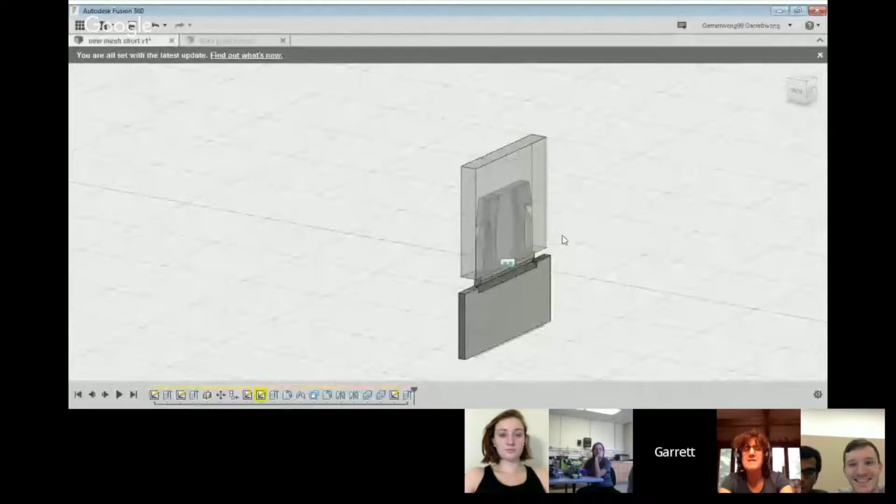I'm not sure if that works, I've never tried it before, but let's see, because I'm a little confused. I do know that the palm mesh takes something like 13 screws. I found them at a very good price, but it's still a lot of screws.

Can you guys see my screen right now? Yes we can. Okay, so this is what the screw looks like on the inside, or the clip looks like on the inside.

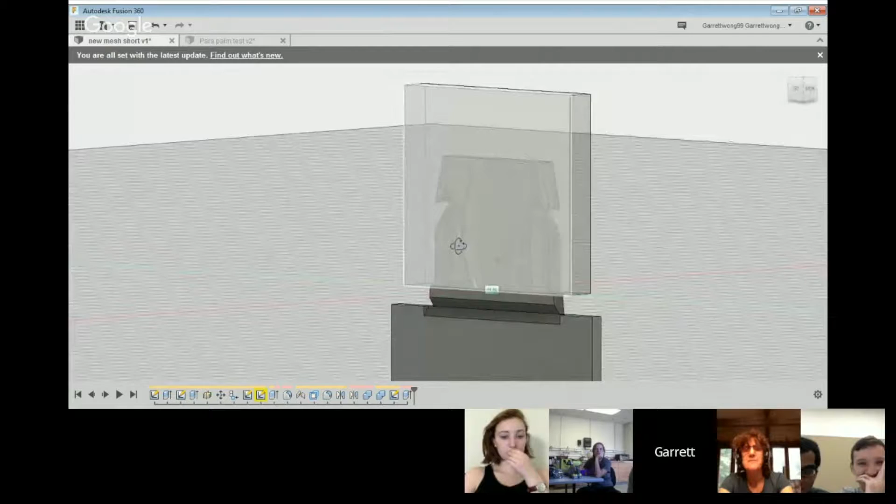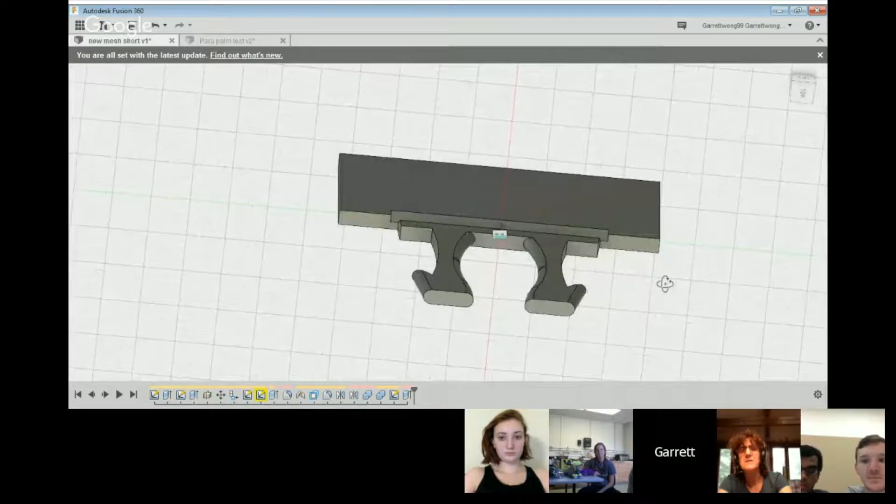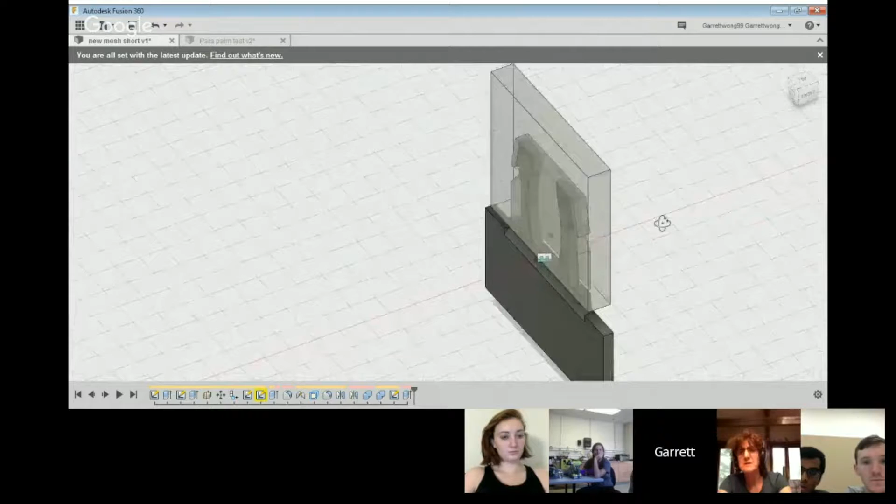Basically, when you push it in, it clicks in, and that prevents it from sliding out. There's a little notch here that makes it easier. This is printed flat - this component is printed flat, and it's just a prototype, so I only printed out part of it. But this is eventually going to be integrated into the rest of the palm mesh, and then these clips, this area over here, is going to be bent up and be able to click into the palm. So if you're imagining this is a section of the palm, this would click into the palm and eliminate the need for screws.

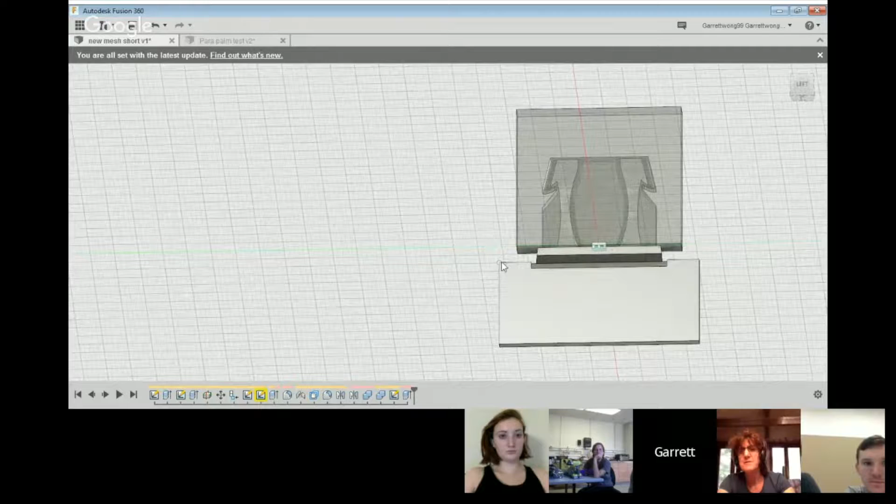Would you have to thermoform it, or do you just have to bend it? You just have to bend it up, make sure it's flat. I might even add a section over here that's a little thicker so that it stays set while the others are soft, because the time it takes for PLA to heat up is proportionate to how thick the material is.

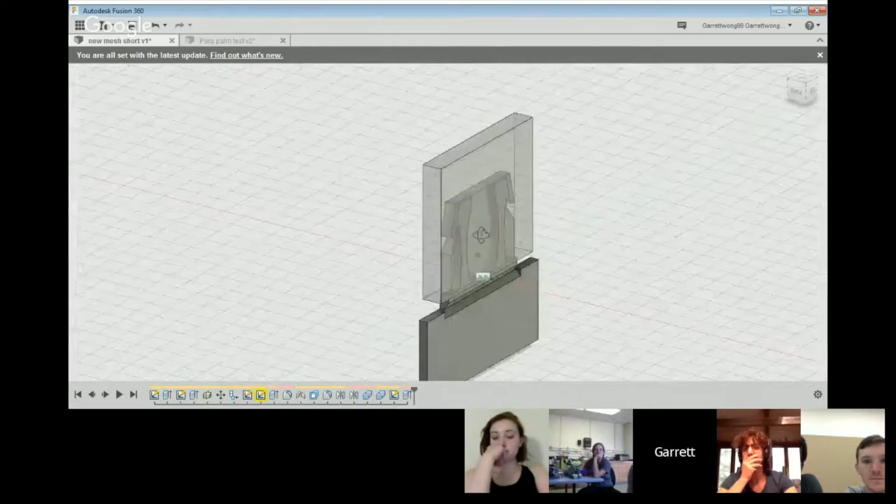So yeah, that was the work for this week. I also modeled a different hand for Andreas in Fusion - it's the Ebe hand for the clinic in Haiti, and hopefully it doesn't crash.

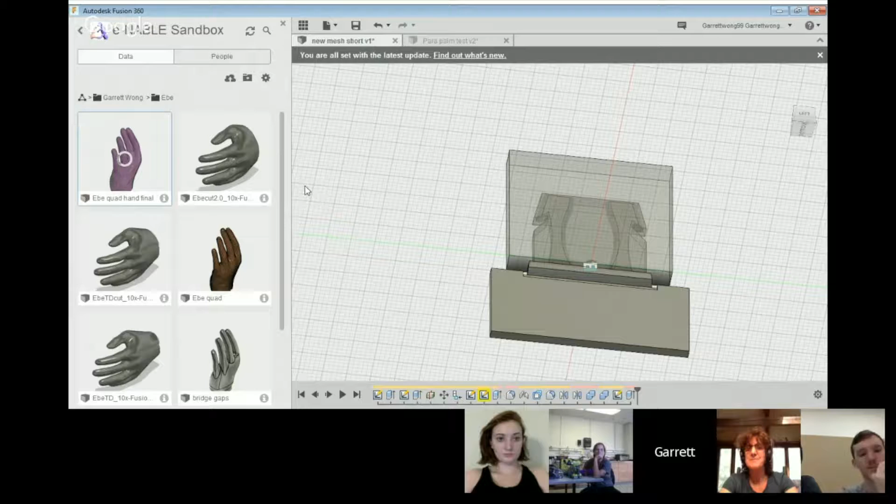Do you have any more information on that hand that you could share for people who don't know much about it? The Ebe hand is basically a very natural looking hand that looks like an actual hand. It doesn't move, there are no moving parts right now, but it's made so that people can blend in a little better, and that's what it looks like.

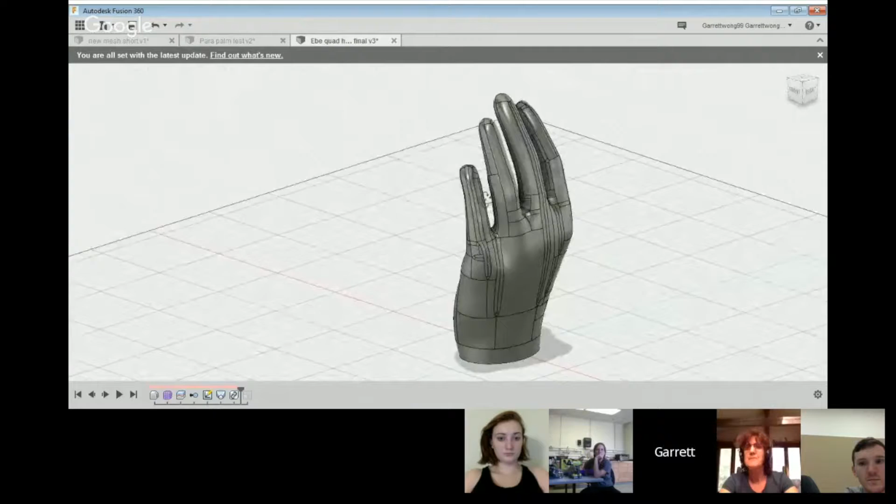So this is the STL file, and I modeled it again on Fusion using surface modeling. It ends up looking like that, pretty close to the actual thing.

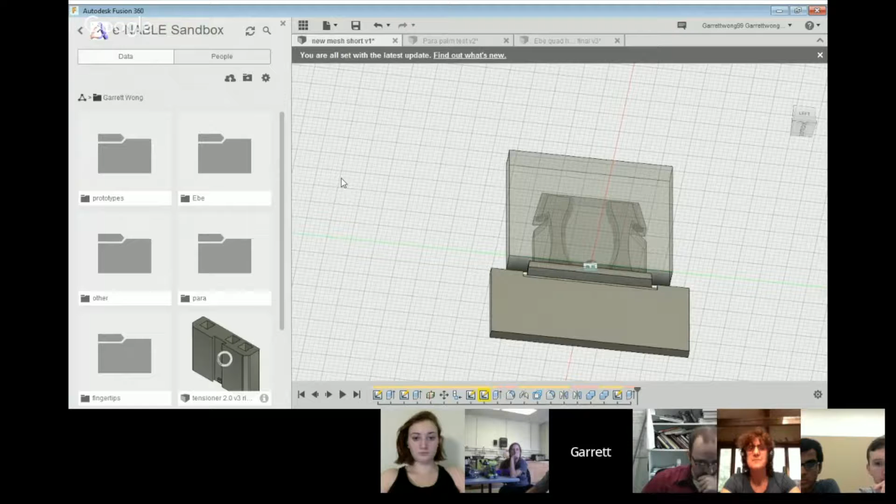There are some patients in Haiti who need resizing for their forearms for this hand. So I went through and customized the parametric model so they could just enter the length of their forearm on their good arm and the circumference of the thickest part, and it configures a forearm for them. Most of the work was done by Andreas, but I basically plugged in the numbers so they could have resized forearms specialized to them.

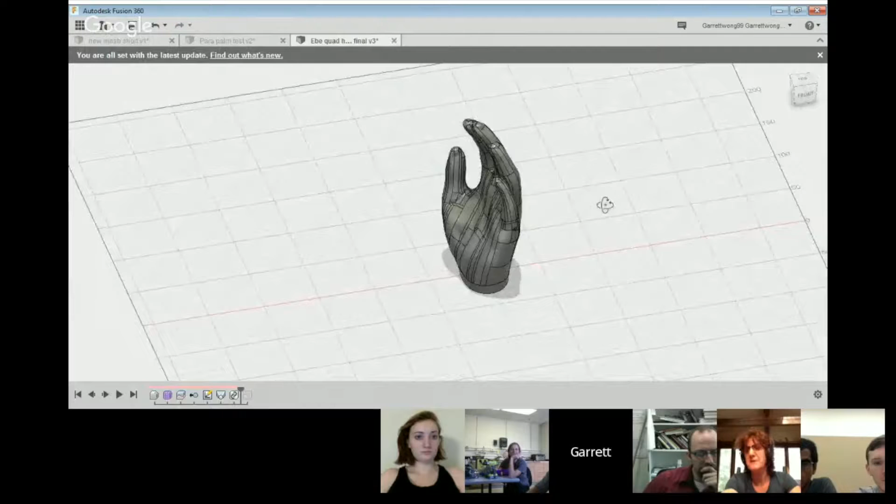And then this hand would attach onto that forearm as a terminal device, right? Yeah, exactly. We export the STLs to them and send it, and the patients in the clinic in Haiti receive their new forearms. It's a great model, and it's been working well, but with what's actually going on in Haiti...

Actually, I kind of cheated to make this one. A guy at work introduced me to Autodesk Remake, which takes the STL and converts it into quads, like a quad ball, instead of the triangles you normally see in STLs, and then takes that and...

Hang on a second, I'm sorry, because I'm not that technical. Could you explain what you mean, please?

Okay, so basically STLs are a bunch of triangles put together, right? Right, I know. And Fusion can't really convert that into a Fusion file because it's kind of like a PDF—you can't go backwards. It's kind of difficult to do that.

So what Autodesk Remake does is take the STL file and export it out instead of triangles as squares, and for some reason Fusion can take care of that. Then I take those squares and convert that to a T-spline, which then converts into a body, which is what you see right now.

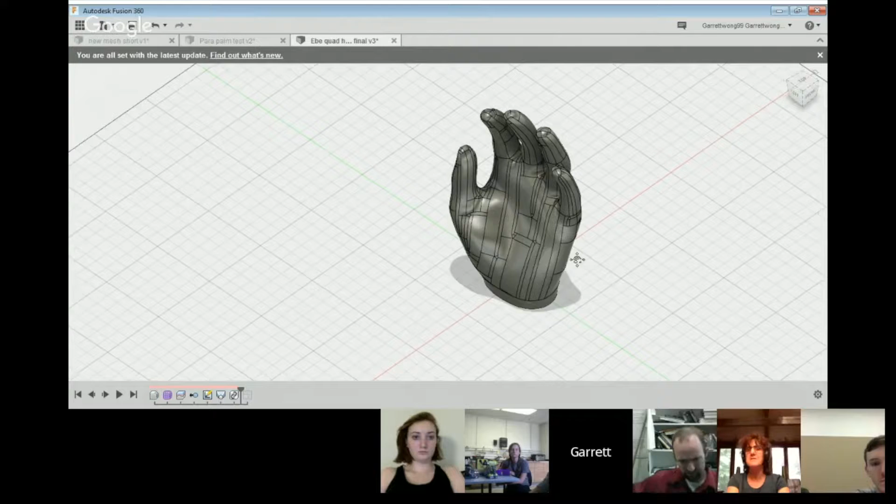I thought that was pretty cool. It improved the workflow a lot, which was interesting. So that was the work for this week.

That's really good. Does anybody have any questions for the work that Garrett has done?

Hey Garrett, could you explain more about this Autodesk Remake thing? So, based on what I understand, you can convert an STL into this intermediate thing, which can then be converted into like a body? I'm not quite sure.

Yeah, exactly, it's pretty cool. The thing is you just have a little bit more control over your file eventually when you finish. I mean, I couldn't do this for the entire Phoenix hand, because I need to control so many little parts of it, so I had to design the whole thing again.

But since this is just like a natural model, it's easier—I have a little bit more control over it if I convert it into a Fusion file. Instead of modeling the whole thing with surface modeling, which is very difficult because you start with a box and push and pull like clay, and it's very hard to get that natural form because you get a lot of folding that ends up messed up. So this was just a cool way that bypasses that, and I thought it was pretty interesting.

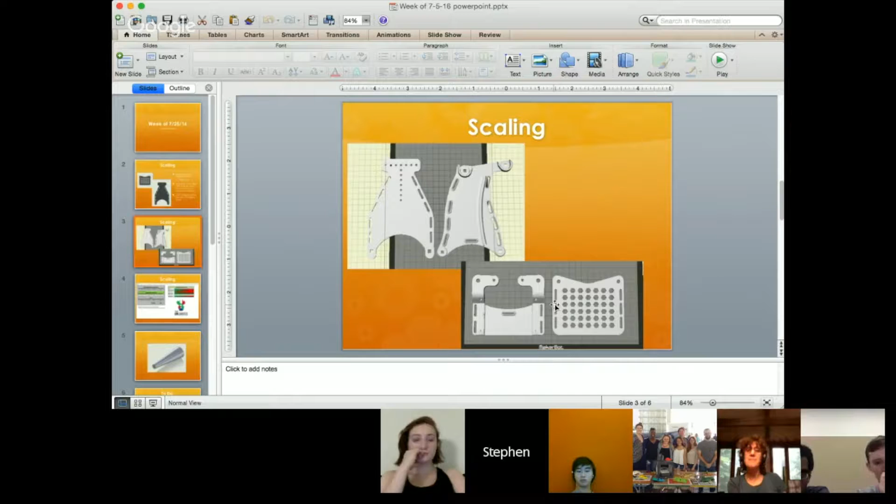So here we have them side by side - this is mine, this is the Unlimbited arm. Just you can see the size change, and then I scaled one up that I printed out today to 120%, and it's pretty much the same. It's virtually the same, so it should be the same theoretically.

And for you guys who aren't familiar with the scaling chart, this is what it looks like. It's really simple, it's really awesome. All you have to do is take 3 different measurements off of the person's arm, and then it'll come out with a hand that is supposed to fit them and also supposed to be the same length as their other arm.

That's another thing I was encountering - for mine, I don't necessarily want it to be the same exact length, because you're going to have a piece of PVC on the end, and you're going to have 1 or 2 or 3 or 4 inches on the end of that. You don't want this ungodly huge device on the end of your arm with an extra 5 inches on it. So what I'm probably going to do in my design is just take off an inch at the 100% scale and then see how it scales up from there, and see if that makes it a little bit better, a little more elegant, I guess.

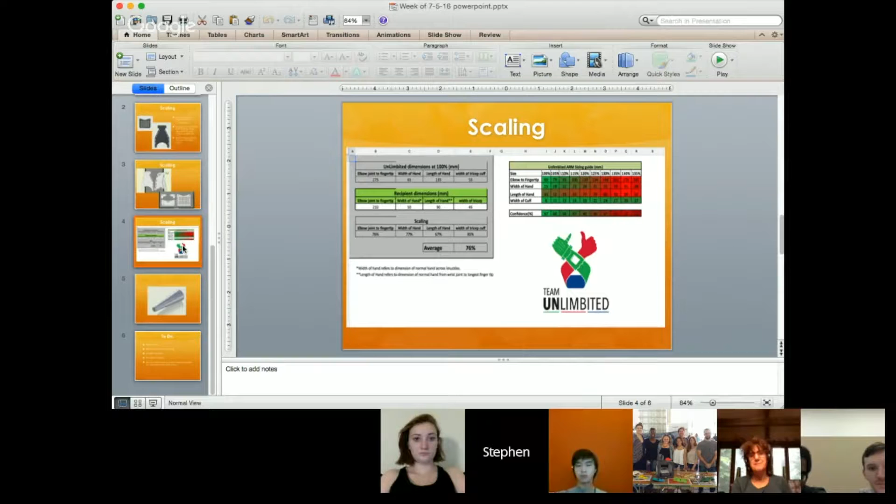So stuff to do this week - I'm ordering the Velcro replacement, which I'm pretty confident in. I don't think I'm going to have any problems with it. Just a reminder, that belt with the 2 hinges on it, you can just pull it back with 1 arm. Then I'm going to make it pretty - make it aesthetically pleasing, hopefully add some cool designs to it and stuff.

And then once I'm done with that stuff, I'm going to set up my official recipient testing and get some actual feedback from someone who knows it best.

A little bit more down the road, as an end goal, I'd like to have - whether it's an Instructable or my official turn-in thing - just a catalog of different attachments that people can download really easily. It'll make it more pleasing for people to download, because if you're just downloading the original files for the device, you have nothing to put on it, and no one's really going to be enticed to do that, I guess. So that's my plan.

Another small factor is that when I change the scaling down - this piece right here is the piece whose length is supposed to be the circumference of 1-inch PVC. When I was originally modeling, I was going off of my actual arm sizes, and I would fit 1-inch PVC because I had a longer arm. But when I scaled it down to 100%, which would ideally be like a small child, 7 or 8, I decided to change this to the circumference of 1/2-inch PVC.

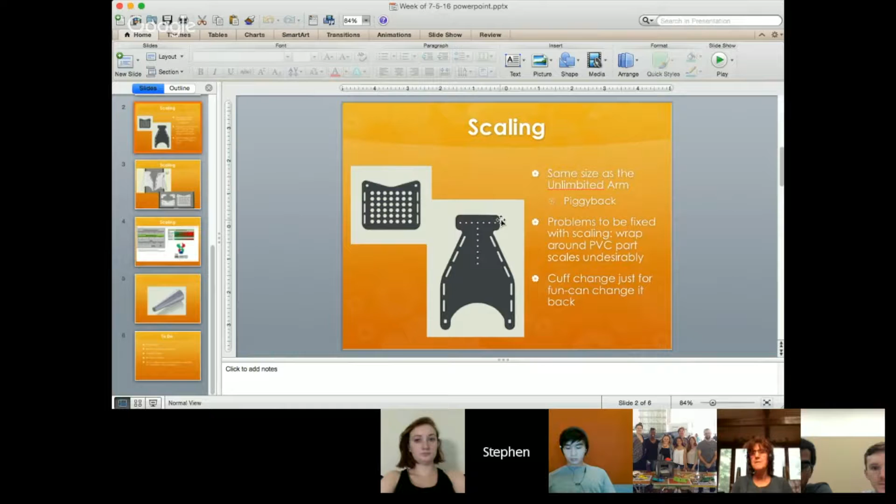That creates kind of an interesting problem - as you're scaling it up between like 130 and 150, you're going to be in between where it's not really 1-inch PVC and not really 1/2-inch, but it'll still fit. Based on our testing with actual screws and bolts, it'll still hold on really nicely. Basically that just means all the attachments, I'll make twice - one for 1/2-inch and one for 1-inch. So it's not a huge deal, just a little something.

So I have a question for you with the jig - if you could just go back to the slide with the jig.

Is there anything else you could use that's not printed, so you're not tied down to the printer problems? I mean, yeah, we'd gone over the dowels and stuff before, but I think because you had talked about that. I was wondering too if you had anybody there with a lathe that could just turn a piece of wood to the right size for you. I mean, that wouldn't help everybody, you'd still need a file or something. Okay, but I'm just thinking to try and give you a solution.

He's saying that we do have that, and that we could do it. Yeah, we'll mess around with that this week, because when we did our first Unlimbited arm here, that's exactly what we did. We made a dowel, put wood on the lathe and turned it to the size we needed, and that worked really well. We've kept it to use for that particular size. But with yours, I don't think you have as much of that sizing issue, so it might help you in the short term so you're not tied down to waiting for something large to print, or if you're having a printer problem.

Yeah, we have that around the campus. It's just a matter of tracking it down and bringing a block of wood in there one day, and getting someone who knows how to do it. Yeah, a lot of the times they have techs who are around, so we'll track that down, because we could do it, but we're sort of far away.

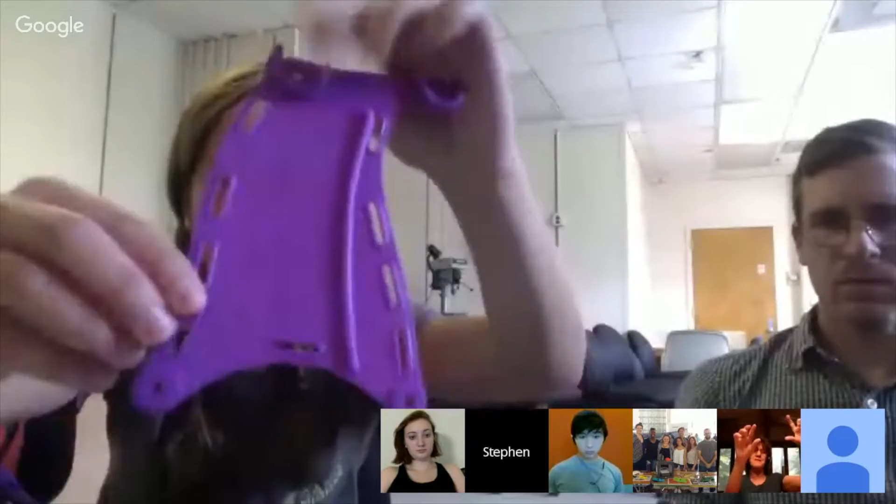So what I'm talking about is that it just— hold it up a bit, there you go. Yeah, so it comes up at the elbow joints, like you can see, it's the same depth and it just protrudes up. I didn't put that on mine, and it seems to be working okay, but I didn't know if there was a reason it was there.

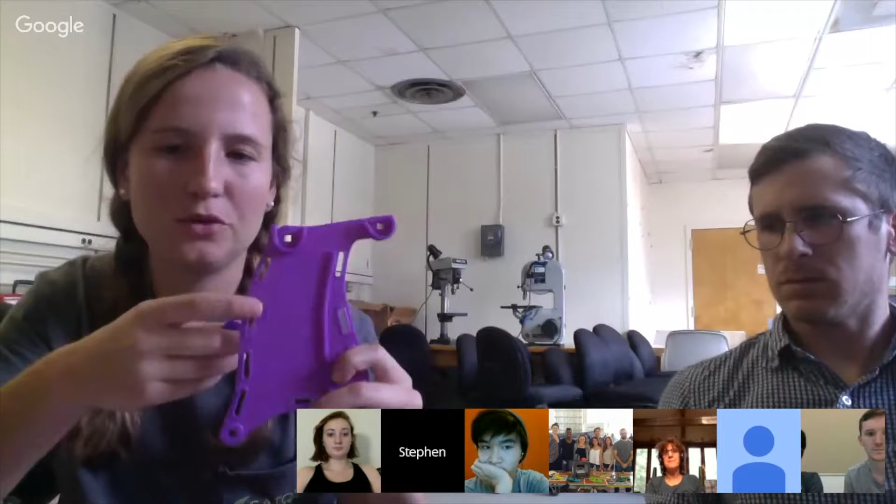Is that down to giving it additional strength at a weak point? Could be. On the regular gauntlets, when we do the flat at the hinge, you put additional material there because that makes it very strong, and because you can print it around as opposed to this way, it adds strength. So they may have done that for additional strength, since that's such a point of stress. Yeah, and I guess they had the same protrusions going around where the Velcro slots are. I think that might be to give it additional strength, since it needs sliding over a lot.

Okay, that's it from me. Has anybody got any questions, comments, or feedback?

Oh, do you want me to talk about the guitar project too? Yeah, do you want to see the guitar arm video? So we here at GRIP, which is like the UF club, have a lot of projects going on right now, and one of the side projects, our first venture into electronics, is basically to have an EMG sensor hooked up to chords and guitar, so when you flex your arm, you'll be able to play the chord.

That was a first try. And then, which one did I get? This one, I think, this is the most recent.

So that's our 3D printing tech, John, who can't play the guitar. We expect it'll sound better, but the idea would be we'll get the actual fingers to line up with the strings a little bit better and maybe get the fit right. But I'm going to start a senior design project this year that actually hooks up some of the sensors and does more of the muscle control of those servos, instead of just having them on a timer programmed.

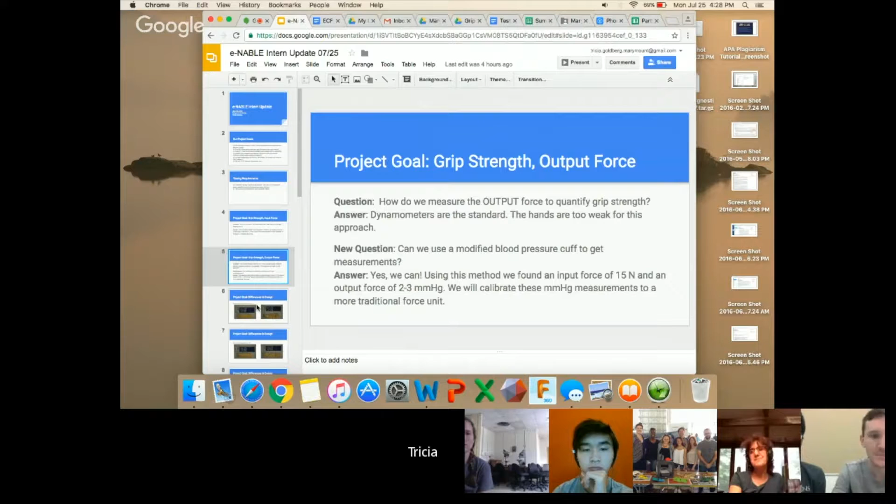We're going to calibrate these millimeters of mercury measurements to a more traditional force unit like the Newton, to get an idea in real language about what that means for us. But we were able to solve both of these problems. Sounds really easy in hindsight, but it took quite a bit of thinking. We found that each of the hands we're testing are all right around that same level.

So that led us to our next project goal, which is the differences in design.

This week I focused on sized 1.3 hands. I used a Phoenix, a Raptor Reloaded, and then a Phoenix hand with the whippletree as the tensioning system. The other two hands used a 3-pin tensioner.

So right here on the left is the before image, and on the right is the after image of the grip. This e-NABLE bookmark is just to give an idea of scaling.

I was on travel, so I wasn't able to have any graph paper with me, so I used something of ours instead. I re-rolled the Theraputty each time to get an idea, so we weren't using the cylinder to measure the hand grip after 3-4 tries. I really tried to make sure we were being consistent with what we were measuring.

So you can see that the Phoenix hand left a pretty good grip inside. You can clearly see each of the fingers left pretty good indentation. Even the strings got pressed into the putty a little bit.

I will figure out how to upload this to the sandbox so everyone can take a look in more detail. The yellow was very soft - this was actually the tan, it looks yellow in the photos, but this is the extra soft. The black does not photograph very well, but that's also the toughest it comes. I wanted to pick something that could give us clear, easy results with little fussing.

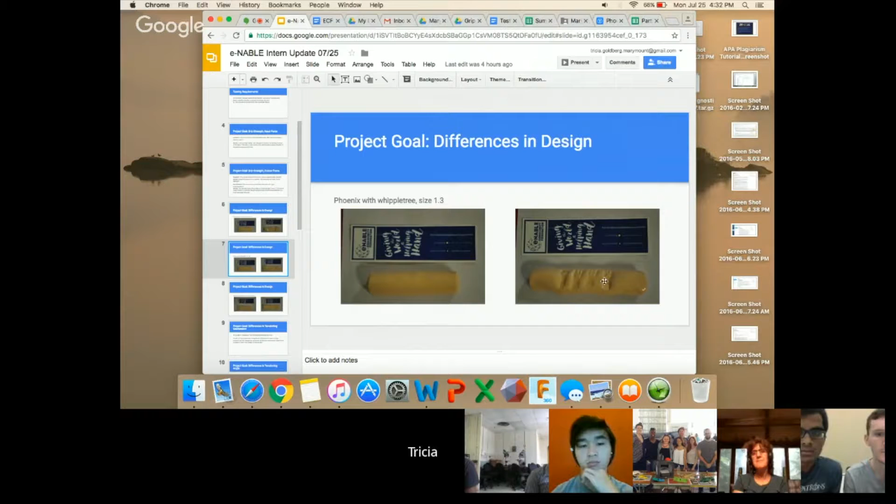Each hand, though, was pretty similar in the impressions regarding depth and change in surface area. But if we go back to the whippletree, this was the most faint of these particular trials - interesting, not what I expected, but we're going to come back and keep retesting these.

We also want to see if the tensioning mechanism really would make any significant difference, like I said - the whippletree really hasn't changed a whole lot. But then we wanted to see if the tensioning angle was going to change. On the left here is where it originally sits at 30 degrees, and on the right is when I changed the tensioning angle to 45 degrees.

This is something we had discussed at one of the events - a MedStar event in Georgetown - and we were wondering if changing this to 45 degrees instead of 30 would increase the depth, the impressions, and the grip strength. What I found, even before I started taking impressions, was that yes, there was a difference. So this is the original impression at 30 degrees.

At 45 degrees, not only did the length expand for the Phoenix with the 3-pin tensioner, but the impressions were also very clear, if not the same. The length of the putty changed more so, meaning the grip was a little bit stronger. Even if the grip pattern depth is still the same, if the surface area length is changing, that means there's a deeper grip.

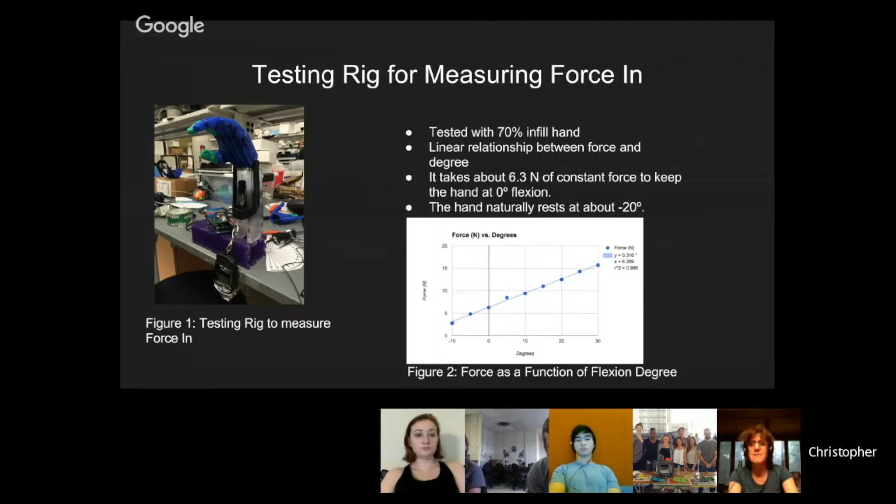That's what we tested with one hand. Overall we're going to be testing across different hand designs to see how that changes, so this can provide us a way to quantify between hand designs.

So that's one half of the equation. The other half is measuring the force that the hand generates for a given degree of flexion. Tricia has a method of doing this that uses a blood pressure cuff.

Unfortunately, our hands don't have enough strength, or they're not large enough to really make that work effectively, so we had to get creative. We cut off the pressure gauge from the blood pressure cuff and connected it to a balloon that was partially inflated and superglued onto airline tubing. This reads naturally a pressure of about 20 millimeters of mercury, and then as you squeeze the balloon, that pressure will increase.

Our force out follows a similar linear trend to the force in, where the further the hand is flexed, the more force it can generate, up to a strength of about 0.8 newtons. It's not a whole lot, but this is also a fairly small hand.

It's a 77% scaled hand, so obviously the larger the hand, the more force you're able to generate. To find the force and convert it from pressure, you have to find the surface area that your hand is connecting with the balloon, and then multiply by that scalar factor.

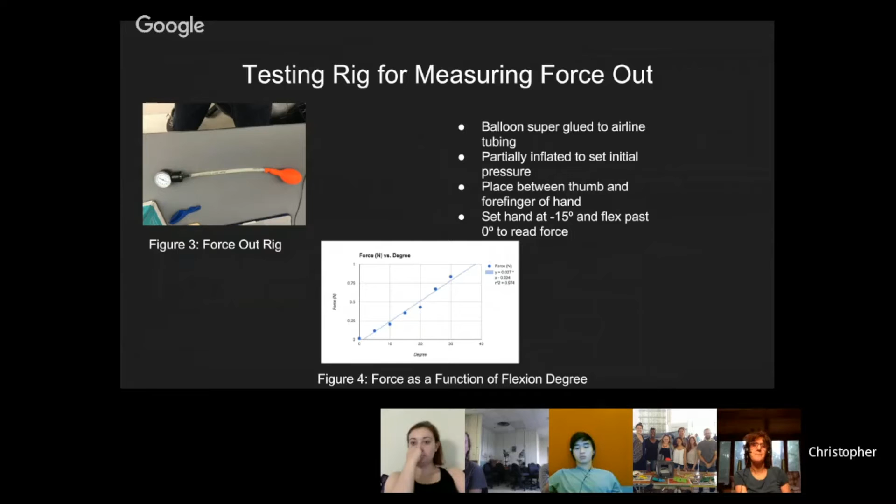So when you put them together, we combined the two rigs, the force out and the force in, to give us a quantitative look at what happens at each degree of flexion in increments of 5. From 0 to 30 degrees, we're able to see the force efficiency between what it takes to flex the hand and what kind of force you can get out of it.

As you can see, it's sort of logarithmic, or it levels out at about 5% efficient, which means it requires about 20 times more force to put into the hand than what you get out.

What we're really looking at this for is comparing different styles of hand or different methods of printing the hand. Currently this hand we tested has 70% infill. We have another with half that infill at 35%, another with a thicker hinge for the fingers, and finally a fourth with a different, less flexible filament material.

Our goal is to figure out a range between how much force it takes to close each hand and how much force you get out.

What we can do with that, as we mentioned last week, is that as a patient progresses in the strength of their wrist, they can have hands that generate more force but also require more force to use. This will both strengthen their muscles in an area that would otherwise be difficult to exercise, as well as give them the ability to hold more objects or for longer without tiring.

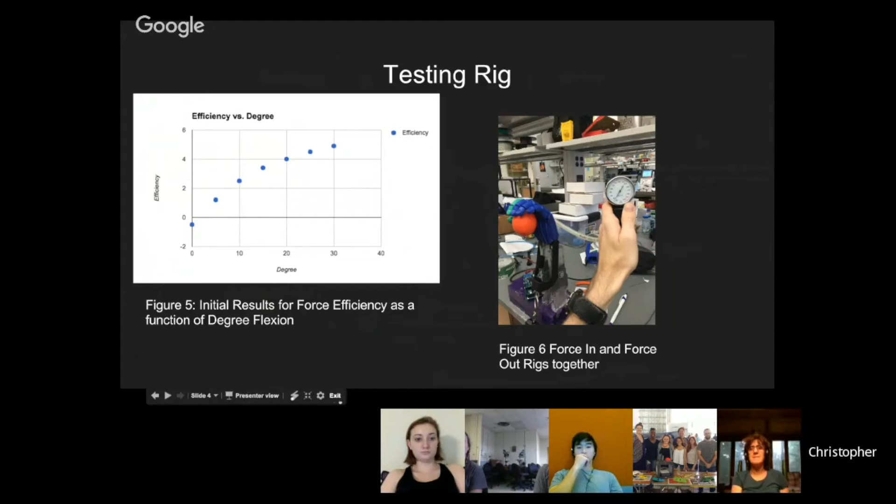So this is the preliminary results for one hand, and we'll be able to compare this to other ones as we continue to test. That's what we've been up to.